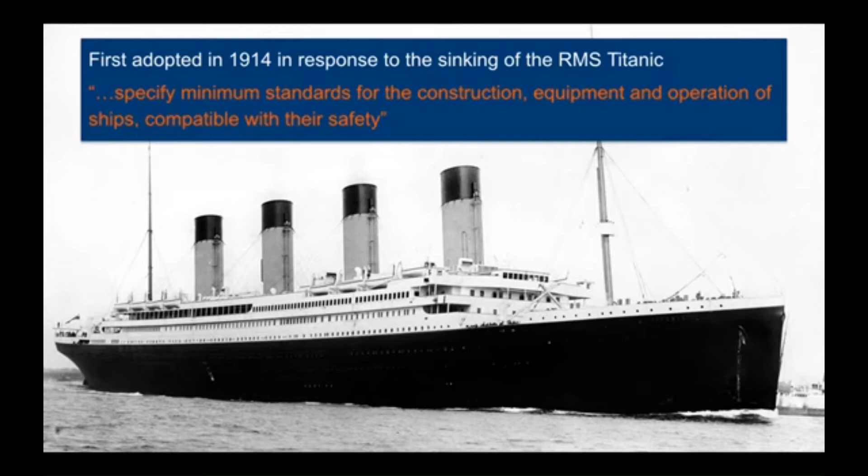The main objective of the SOLAS Convention, as stated by the International Maritime Organization, is to specify minimum standards for the construction, equipment and operation of ships compatible with their safety. The sinking of the Titanic, the unsinkable ship, gave rise to the development of the Safety of Life at Sea Convention. It is a key maritime convention. The areas covered in the original 1914 convention included construction, life-saving appliances, safety of navigation, wireless telegraphy and certification. With the exception of wireless telegraphy, which is given over to satellite communications, these systems can already be identified in the present 1974 SOLAS Convention.

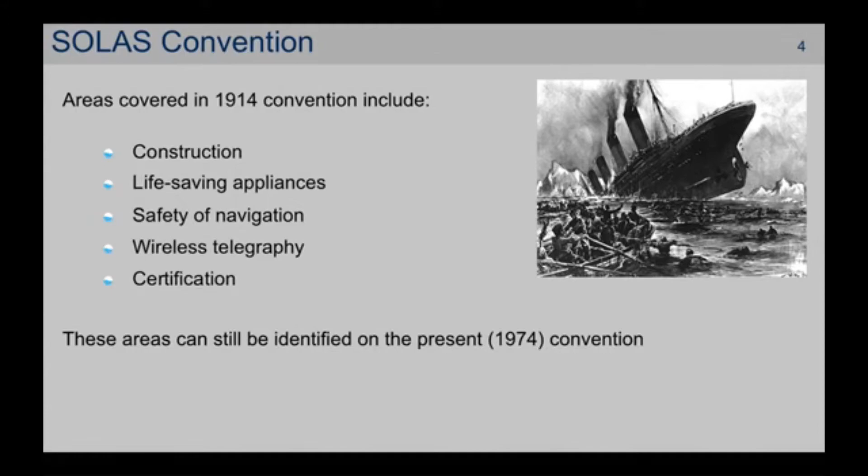There are at present 13 chapters in the SOLAS Convention. Each chapter covers a different topic of interest. It is expected that a 14th chapter, concerned with the adoption of an international code for the safety of ships operating in polar waters, known as the Polar Code, will be added in 2017. Flag states are responsible for ensuring that ships under their flag comply with the requirements of SOLAS. A number of certificates are prescribed in the Convention, and these have to be retained on board the ship as proof that the flag state has complied with its responsibilities.

The Herald of Free Enterprise was leaving the port of Zeebrugge. Its bow doors were open and that was unknown by the bridge. On departing from the port and entering into the English Channel, water was taken on board onto the car deck. A capsizing moment was created and the ship capsized, fortunately capsizing onto a sandbank. Nonetheless, 193 persons died and questions were asked. This was the biggest loss of passenger life on board a British ship since the sinking of the Titanic, except of course for wartime.

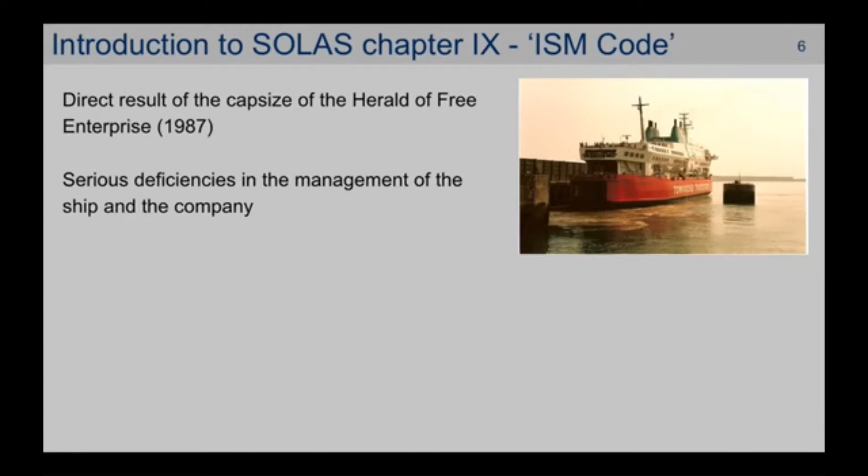An inquiry was established, and it was found that there were serious deficiencies in the management of the ship and of the company. And whilst the open bow door was the initial cause of the incident, it wasn't the only cause. The judge who conducted the inquiry, Lord Justice Sheen, made this statement which is well known. He said that from top to bottom, the body corporate was infected with the disease of sloppiness. The incident was only one of many in the 1980s in which concerns were raised about the human factor and the culture in the shipping industry towards safety.

An opportunity was taken: the creation of the International Safety Management Code. This was the response which supported changing attitudes towards safety in the shipping industry. A culture of unthinking compliance with external rules moved towards a culture of thinking self-regulation of safety and the development of a safety culture. That is, a culture in which every individual feels responsible for actions taken to improve safety.

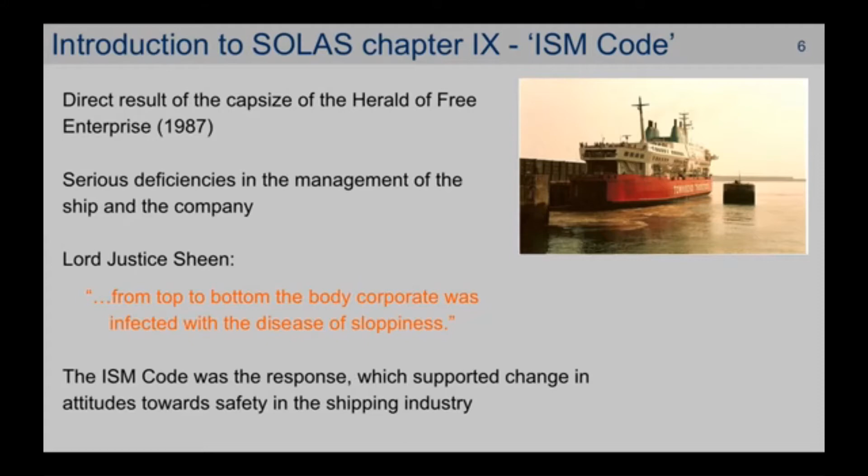The aim of the International Safety Management Code is to ensure that safety at sea, the prevention of human injury or loss of life, and the avoidance of damage to the environment are in fact maintained. To ensure that the objectives can be accomplished, a shipping company must devise safety management objectives. Amongst other matters, they must provide safe practices in ship operation and a safe working environment.

The objectives must also assess risks to the ship, to personnel, and to the environment. And finally, they must improve the safety management skills of not only personnel aboard the ship, but also ashore, including, of course, in preparation for emergencies.

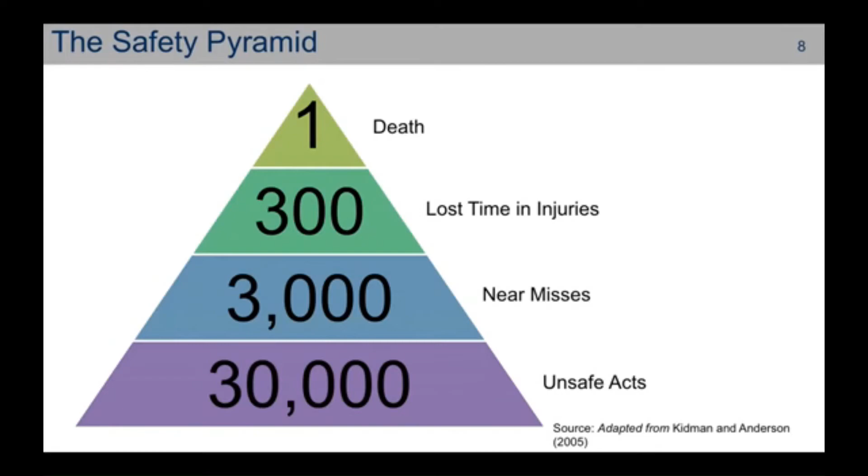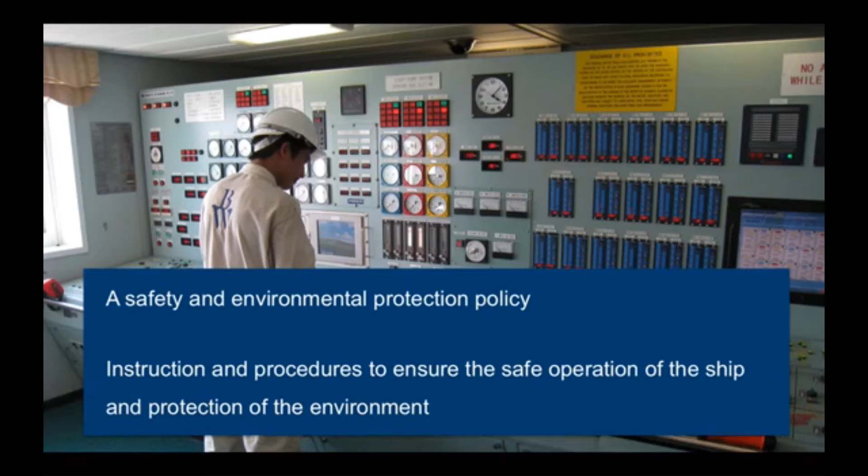The SMS, or the Safety Management System, is a requirement of the ISM Code. Every ship is required to have a safety management system on board, and this will include the following: a safety and environmental protection policy, instructions and procedures to ensure the safe operation of the ship and the protection of the environment in compliance with international and flag state legislation, defined levels of authority and lines of communication, particularly between shore and ship-based personnel.

In addition, procedures for reporting accidents and also for reporting non-conformities, procedures to prepare for and respond to emergency situations, and finally procedures to undertake internal audits and management reviews. Whilst there have been objections to the establishment of safety management systems, what is actually undertaken is nothing less than best practice, which has been undertaken by many shipping companies throughout the years.

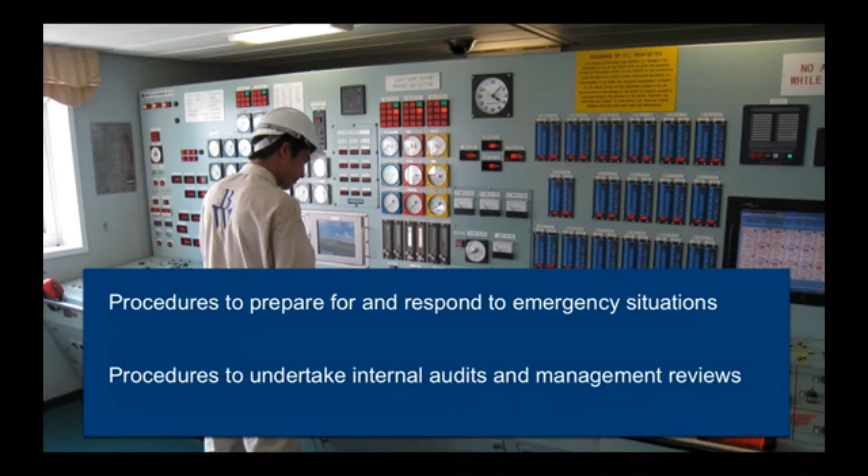It was recognised that there were problems in implementing the ISM code. First of all, the safety management system requires commitment. Commitment from the top. That is from the directors, the managers and the supervisors. You may ask why. Well, the directors, managers and supervisors have got interests which of course are of a financial type. But in addition to that, they are now being forced to ensure that they have an interest in safety of the ships which they operate. So commitment from the top is what is necessary.

There is also the need for commitment from other employees. Without commitment, effort will be wasted. Each company will differ in detail, but the directors will need to provide the material and financial resources needed to develop and maintain a safety management system.

For many years there have been barriers between ship and shore. For a safety management system to be made effective, the barriers have to fall. And this was certainly the case in the Herald of Free Enterprise incident, where ship's masters were informing the shore managers that there were problems regarding the closure of doors, and shore management ignoring what they were being told. All persons, both sea and shore personnel, have to be encouraged to cooperate in the development and the maintenance of the safety management system. The system is dependent on all working together.

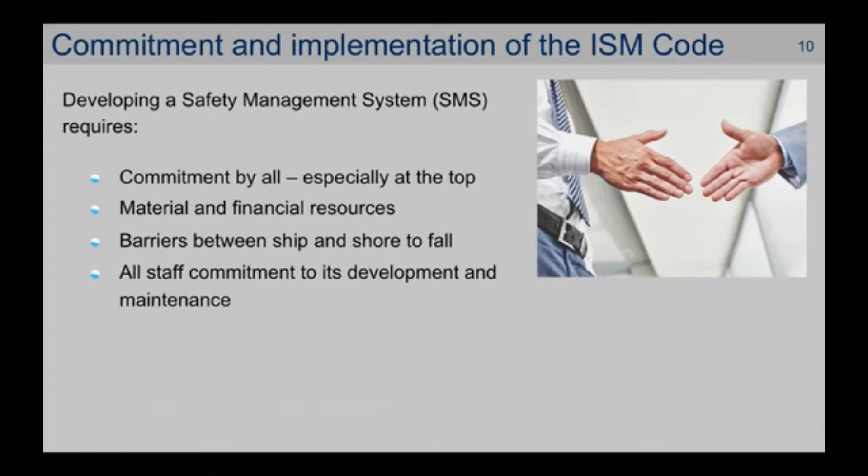In the past, the ship's master was master to none other but God. Today, the ship's master is an employee of a shipping company. He therefore has to work within the requirements of the shipping company. The shipping company also has to recognise this, and so there has been established somebody called a DPA. A DPA is known as a designated person ashore. To ensure the safety of the ship and that links are provided between the company and those on board a ship, a member of management will be given the responsibilities to confirm the effectiveness of the safety management system, to report deficiencies to the highest level in the company, and to organise safety audits.

A designated person ashore is not just anyone. He is a very special person who will have experience in both safety and pollution control activities. It is a major responsibility of a person who will usually sit on the board so that he can report to the board the concerns and the issues which have been passed to him through the ships and the ship's masters.

The ship's master has already been mentioned. He has overall responsibility and authority for what goes on board the ship. He is also required to implement the safety management system on board the ship. He has to observe the safety and environmental policies established by the company, and he has to motivate the crew in the methods required by the safety management system.

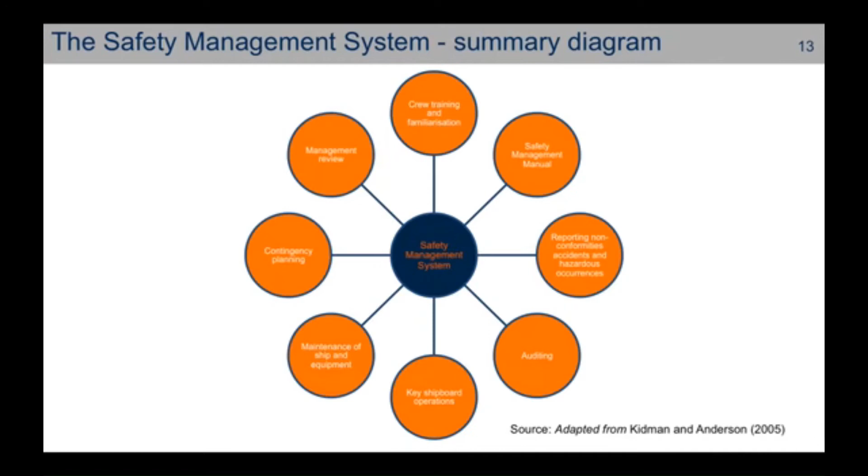Training and familiarisation are critical issues for the safety management system. Statutory training courses have to be undertaken by all sea staff, as required by the Standards of Training, Certification and Watchkeeping Convention, known simply as STCW. Safety training courses will include firefighting, the use of life-saving appliances, and for deck officers, the use of electronic systems such as ECDIS.

The safety management system will require training drills to be carried out. These are carried out to cover likely emergency situations which could occur to the ship. Crews are required also to be familiar with the ship, and this requires something known as familiarisation.

This is an important part of the safety management system and avoids what is sometimes called the pier head jump, where persons will be employed aboard a ship without actually having familiarised themselves with the ship and its equipment before the ship sets sail. So that familiarisation then ensures that duties, including safety management system duties, are always maintained at effective performance levels.

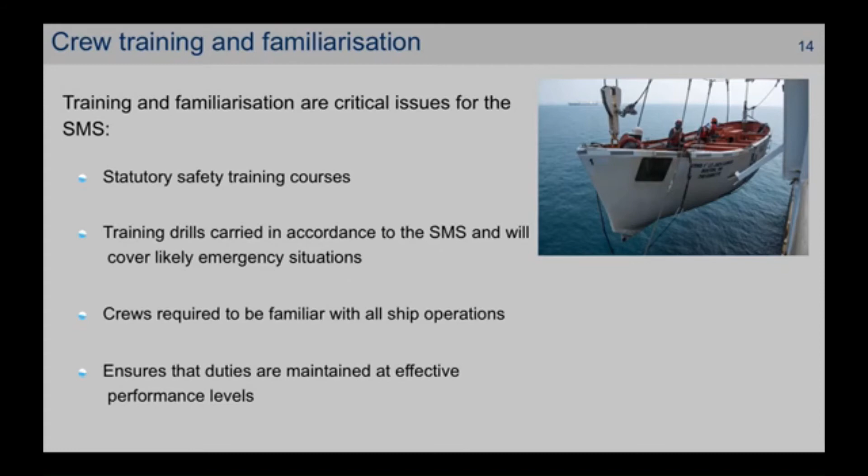It is a requirement of the ISM Code that a company should establish plans for shipboard operations. The subject matter of plans can be developed for many activities, and indeed each ship will have its own individual activities which have to be considered. The International Chamber of Shipping provides guidelines on the application of the IMO International Safety Management Code, and it covers 5 scenarios. These are covered under the headings General, the ship in port, preparing for sea, the ship at sea, and preparing for arrival at port.

It is also suggested that the type of operations can be split between special shipboard operations and critical shipboard operations. Special shipboard operations are those where errors may become apparent only after they have created a hazardous situation, or after an accident has occurred, such as charts not being updated.

Critical shipboard operations are those where an error could immediately cause an accident or situation which could threaten people, the environment or the ship, such as navigating in areas of high density traffic. Summarising this slide, there are 5 scenarios which are provided, and within each of those scenarios we can look at and critically suggest special shipboard operations and critical shipboard operations.

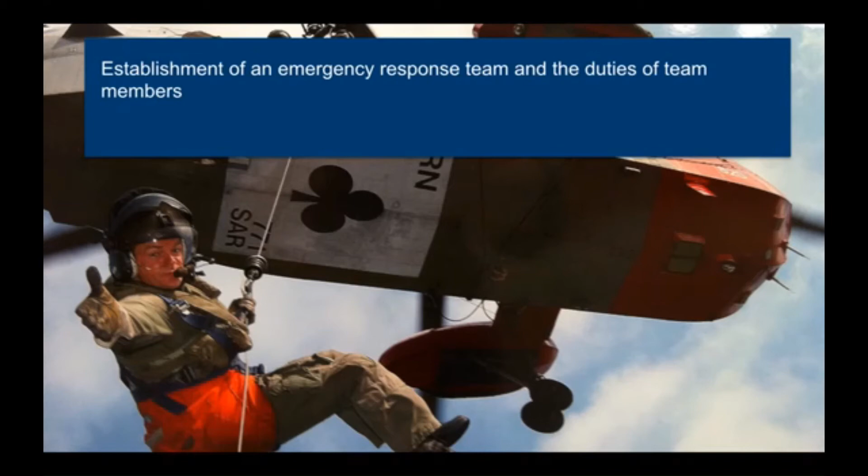Within a shore-based contingency plan, the following are likely to be included: the establishment of an emergency response team, and the allocation of duties of team members. For example, we might well have a naval architect, a marine superintendent, or an engineer involved in the emergency response team.

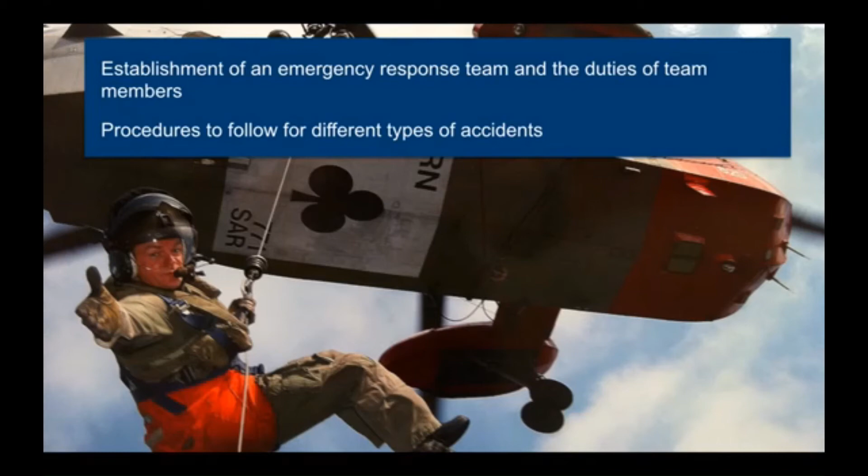Secondly, procedures. Procedures to be followed for different types of accidents. And thirdly, the availability of ship's information, including plans, stability information and details of safety equipment on board the individual ship. It is also helpful to establish checklists to be used in the different scenarios.

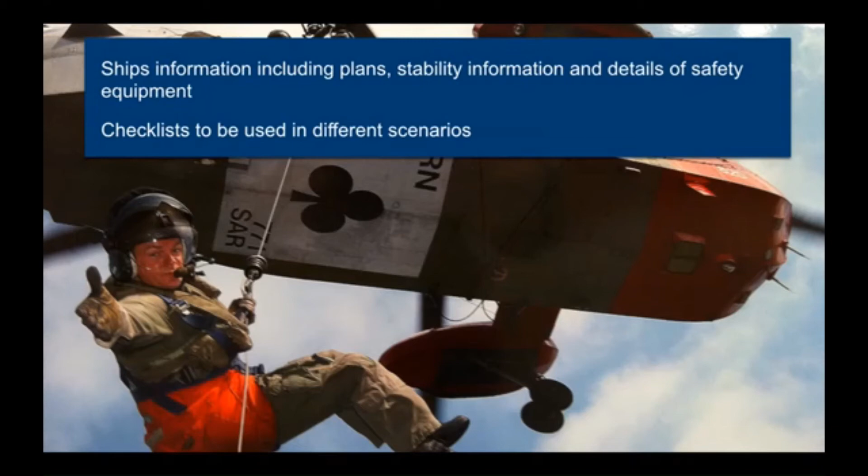In addition to the shore-based contingency planning, a ship must also have a contingency plan. The shipboard contingency plan will consider the different types of emergencies, as indeed it does for the shore-based contingency planning. It too will allocate the duties of those on board, and in fact concern itself with the actions to be taken to regain control of a situation.

Of importance to be considered are communication methods, both used on board and between ship and shore. And finally, the ship has also got to consider procedures associated with dealing with the media.

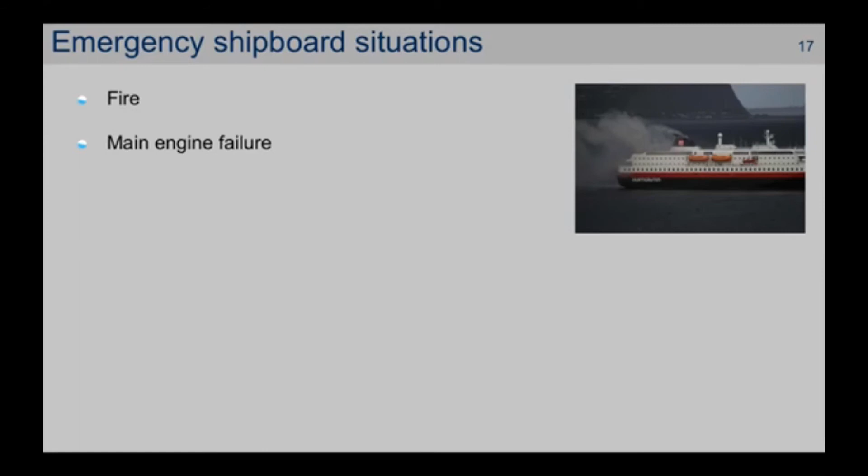There are many potential areas which may give rise to an emergency shipboard situation, including fire, main engine failure, collision and grounding, structural failure, man overboard, cargo shifting, heavy weather damage, terrorism and piracy. Is that all? No, perhaps you could think that there are some other areas which could give rise to an emergency in a shipboard situation.

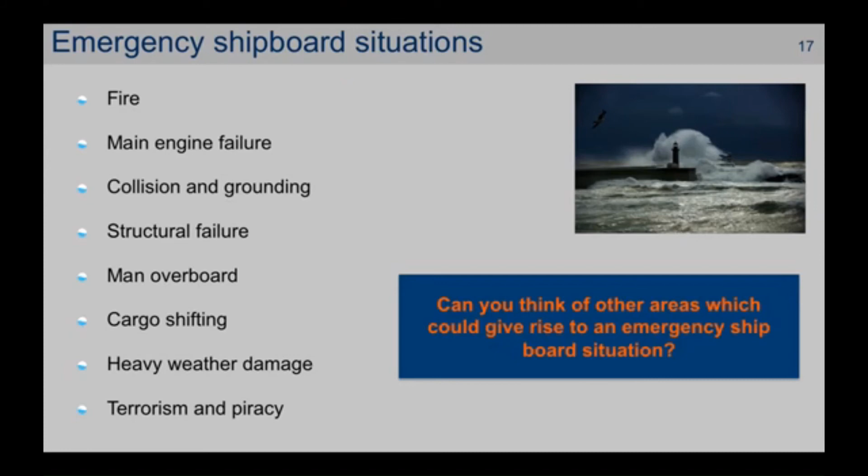The safety management system also requires reports of non-conformities, accidents and hazardous occurrences to be made. Very simply, under the SMS, the Safety Management System, the master has to report the following to the designated person ashore: accidents, hazardous occurrences, non-conformities within the SMS, and suggested modifications to the safety management system. These reports have to be analysed, and after analysis, it may lead to corrective action being taken.

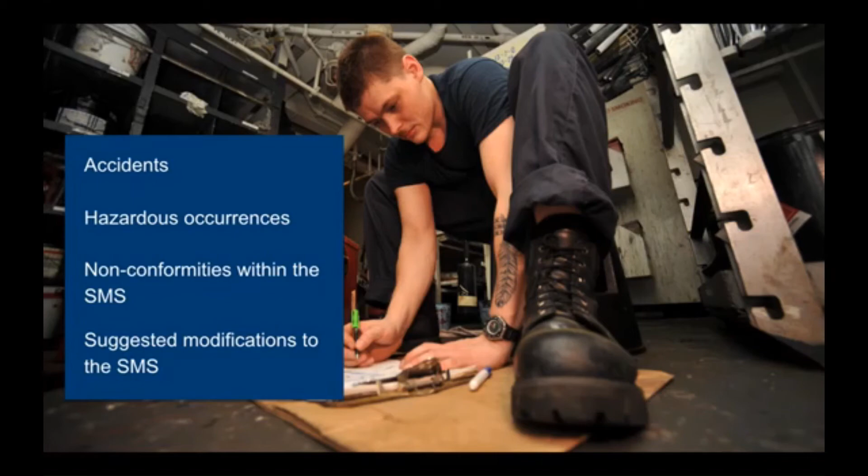It is always incumbent on a company to establish procedures to ensure that the ship and its equipment is maintained as required by the relevant international, national and company regulations and requirements. Procedures are established to ensure that maintenance, repairs and relevant surveys are carried out in a planned, safe and timely manner, ensuring that the seaworthiness of the ship is maintained at all times. As Port State Control inspectors will say, sometimes this is not undertaken as it should be.

A company is required to establish and maintain procedures to control all documents and data relevant to the SMS. The documents may be referred to as the Safety Management Manual. They can be kept in a form that the company considers most effective, either electronic, paper, or sometimes a combination of both. Under SOLAS Chapter 9, a Document of Compliance, abbreviated to DOC, is issued to every company which complies with the ISM Code. It is issued by the flag state, and the DOC is valid for 5 years.

A ship is provided with a Safety Management Certificate, abbreviated to SMC. This is provided by the flag state again. It follows an initial verification of compliance with the ISM Code. It also requires that the company responsible for the operation of the ship has an appropriate DOC. A Safety Management Certificate, like the Document of Compliance, is valid for 5 years.

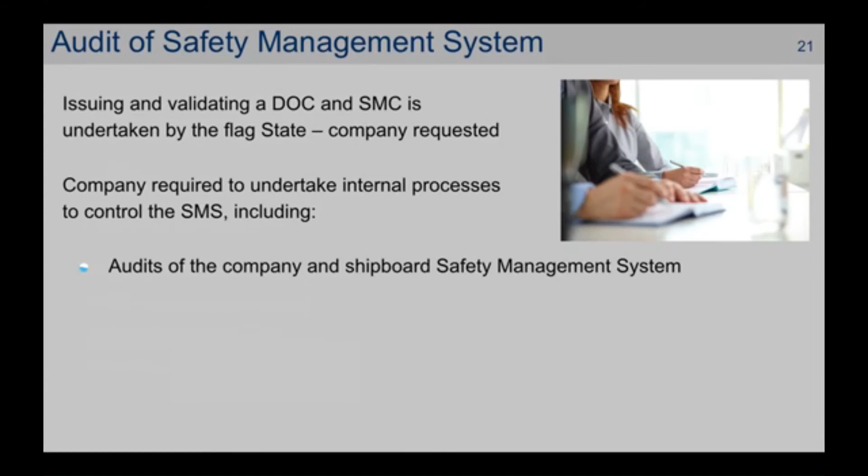In addition to the external verification mentioned above, and recognising the self-regulatory principle of the International Safety Management Code, companies are required to undertake internal processes. The internal processes will help to control the safety management system, and they include the company shipboard SMS audits, SMS reviews and reports which have been given by the DPA, and feedback systems associated with the reporting of non-conformities.

Details and guidance of how SMS audits are undertaken, including the competence of the auditors, audit scheduling, preparation and planning, conduct of audits and the reporting of audits, are comprehensively covered in the International Chamber of Shipping publication already referred to, that is the Guidelines on the Application of the IMO International Safety Management Code.

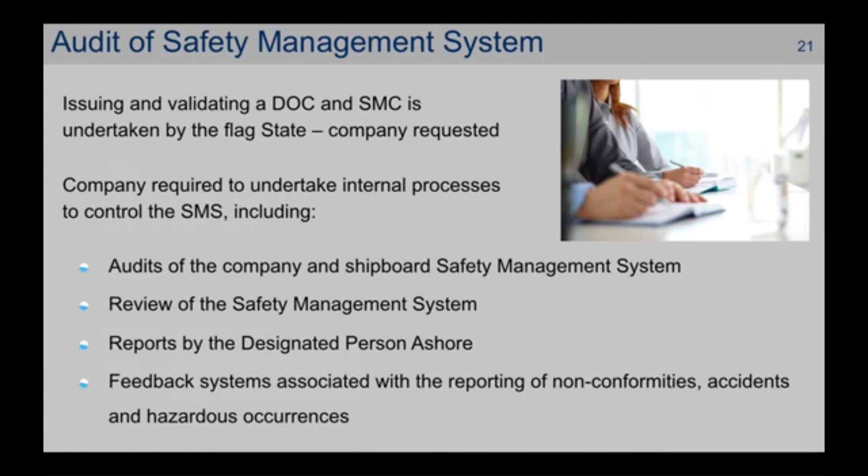The reason for the development of the ISM Code was to improve the quality of safety management of ships. The basic idea was to establish best practice across the international shipping fleet. Overall, this has been done. There is criticism as to how much additional bureaucracy some systems have created. Since the full implementation of the ISM in 2002, there have been a significant number of reductions in marine casualties and lives lost at sea. The ISM Code has established self-regulation and a safety culture.

Having followed this lecture, you should be able to outline the contents of the Safety of Life at Sea Convention. You will recall there are 13 chapters at present, with a 14th chapter pending. You should be able to examine the objectives and implementation of SOLAS Chapter 9 and the importance of the International Safety Management Code. And you should be able to distill the responsibilities of the ship's master and the shipping company for the development and implementation of a safety management system.

A useful paper to read is titled Implementing an Effective Safety Culture and can be downloaded from the website of the International Chamber of Shipping.